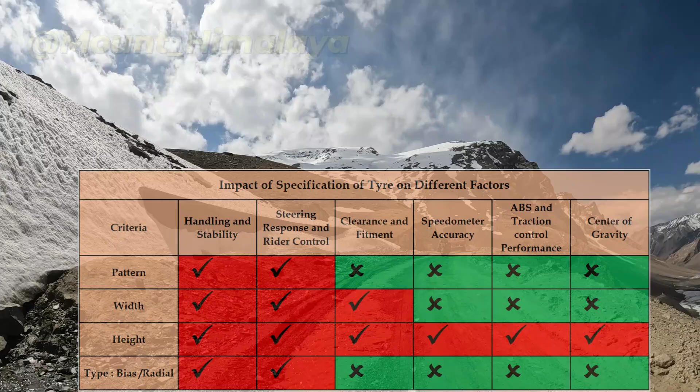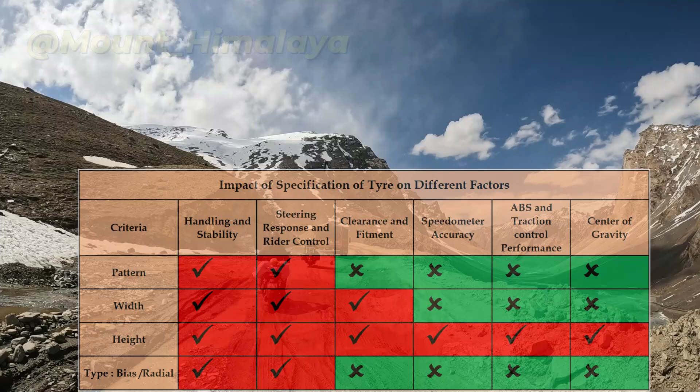Let us discuss the impact of changing the specification of the tire, assuming that you are not changing the rim size. I am considering the pattern of the tire, width of the tire, height of the tire, and type of the tire. Type of the tire means radial or bias. The pattern selection is purely based on usage, whether you are using it on-road, off-road, 50% on-road, 50% off-road, in snow conditions, wet, or dry. Pattern of tire depends on these requirements of usage.

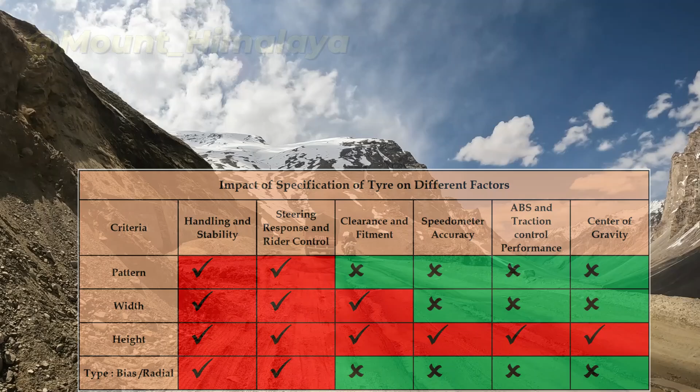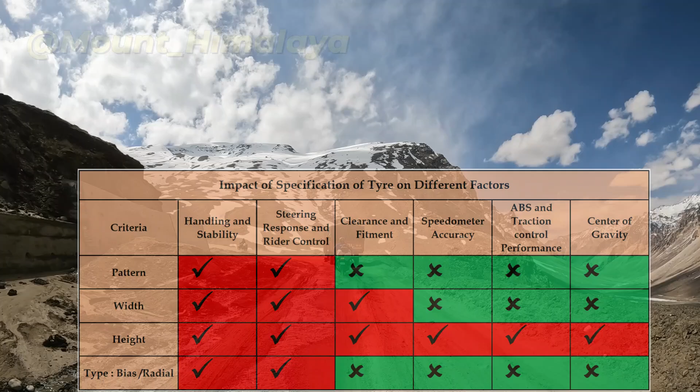Let us discuss how these four factors are going to affect handling and stability, steering response and rider control, clearance and fitment, speedometer accuracy, ABS and traction control performance, center of gravity and weight distribution. Look at the table. Here I have considered the specification of tires and how it is going to affect these factors.

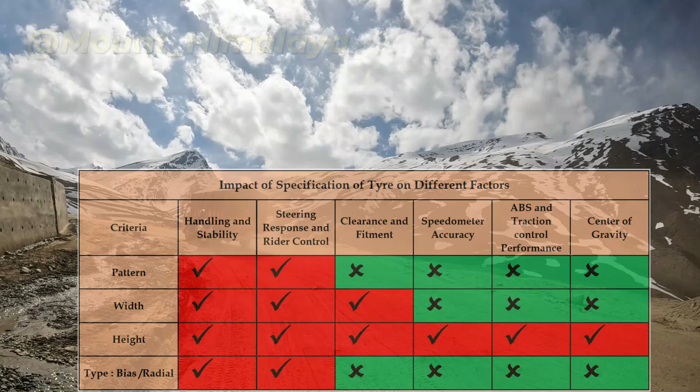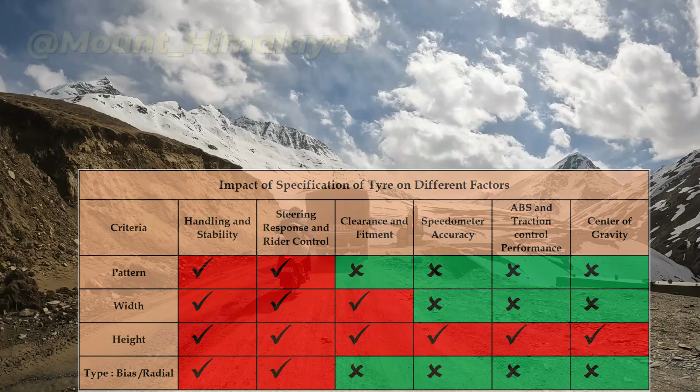Changing to a tire of different pattern is going to alter the handling and stability of the bike either way. It can give a good or bad experience after changing the pattern of the tire. So please choose your pattern based on your usage type: off-roading, on-roading, 50% off-roading or 50% on-roading, etc. Similarly, changing the pattern can affect the steering response too.

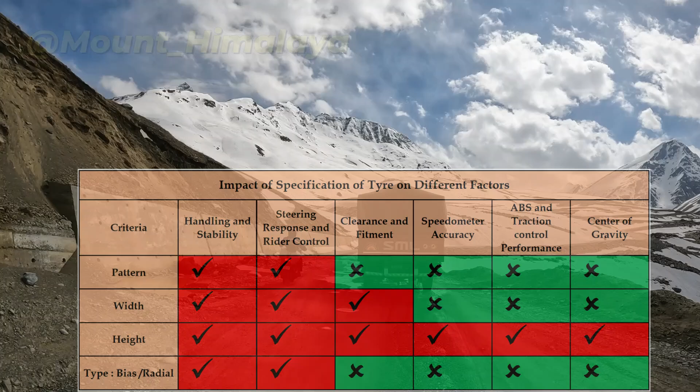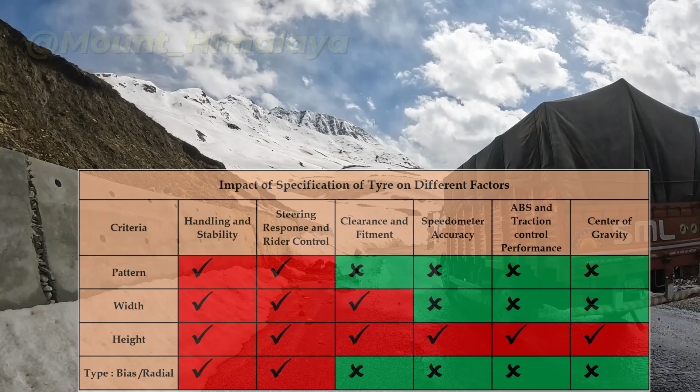At the same time, changing the pattern is not going to affect the clearance and fitment with the mudguard and all these things. It's not going to affect speedometer accuracy either. For ABS and traction control, there is no impact from changing the pattern. There is also no impact on the center of gravity of the vehicle by changing the pattern of the tire. So you can simply change the pattern of tire for handling and stability, and steering response.

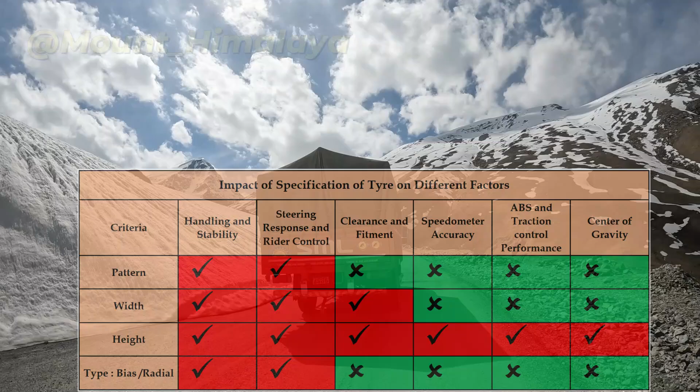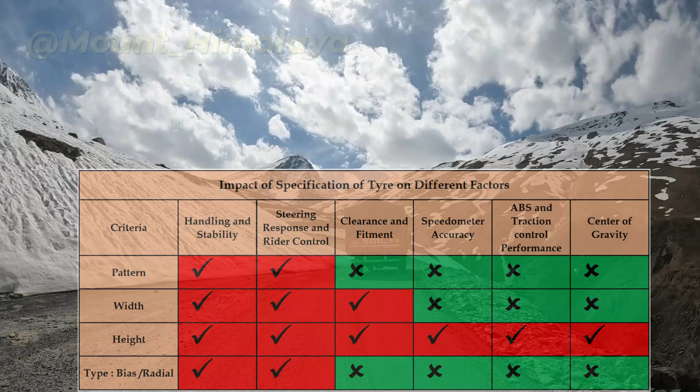Next is the impact of changing the width of the tire on handling and stability. Yes, changing the width of the tire is going to impact handling and stability. The handling and stability will be affected once you change the width of the tire, and steering response and rider control will also be affected. Clearance and fitment, sometimes the mudguard, the gap, everything can be affected if you change the width of the tire.

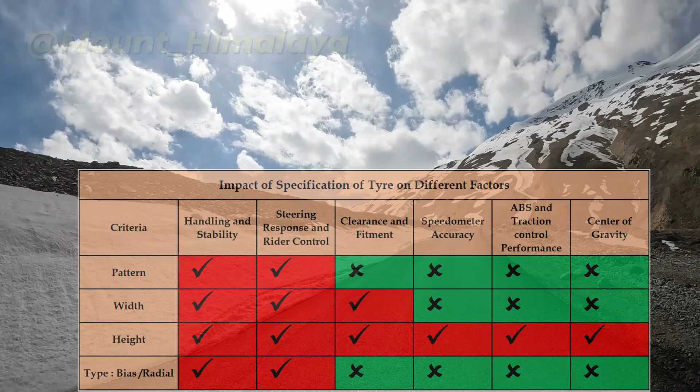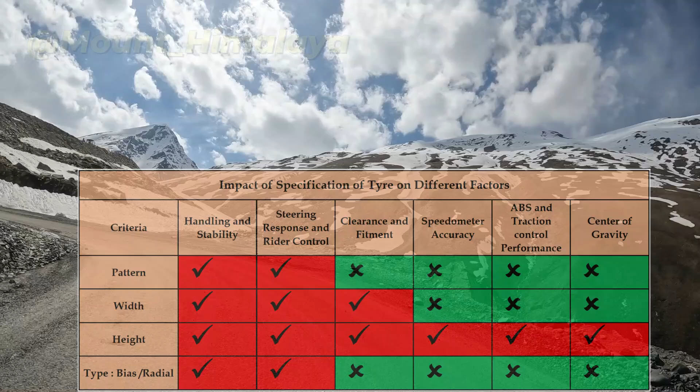Please note that there is a superstition that a wider tire is going to give you more traction, which is absolutely wrong. If you know the fundamental physics, since the total force remains the same, it will just be distributed, so there will not be any improvement of traction if you increase the width of the tire. Also, just changing the width of the tire is not going to affect the speedometer accuracy, ABS and traction control performance, and it is not affecting the center of gravity of the vehicle.

Next is how the height of the tire is going to impact these factors. First is handling and stability. An increase or decrease in height can definitely affect the handling and stability of the vehicle. It can affect the steering response too, and rider control also. It can affect the clearance and fitment. Since the tire height is changing, it is definitely going to affect the rotation. That means your speedometer accuracy will definitely be affected.

Also, the calibration of ABS and traction control will be affected. Due to the height changes, it will definitely affect the center of gravity too. So from this table, you will come to know height is a factor impacting all of these. So changing the height of the tire is not recommended.

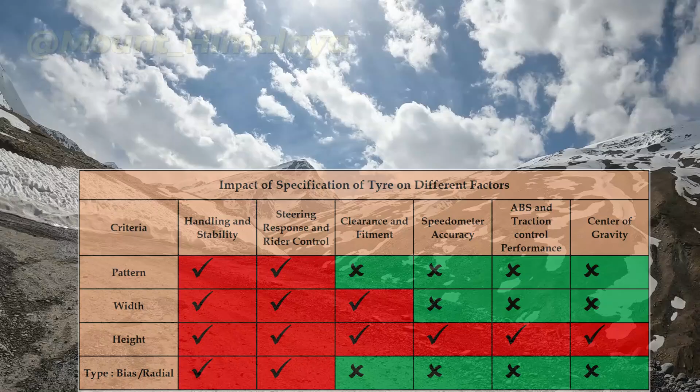Next is the impact of radial and bias tires on these factors. Radial tires can offer more comfort than bias ply tires. Bias ply tires are often used for heavy loads and off-road purposes, whereas radial tires offer superior traction and grip with consistent road contact, making them ideal for high speed and everyday use.

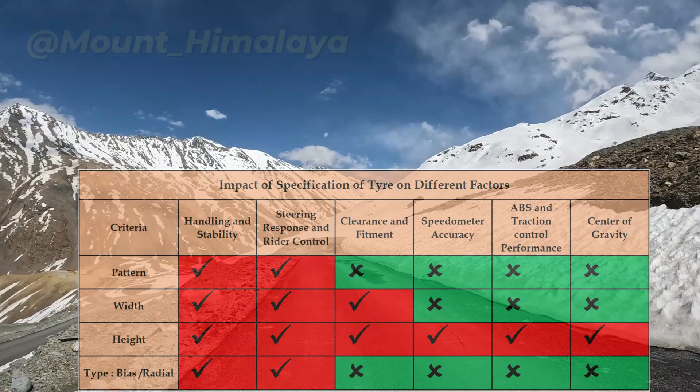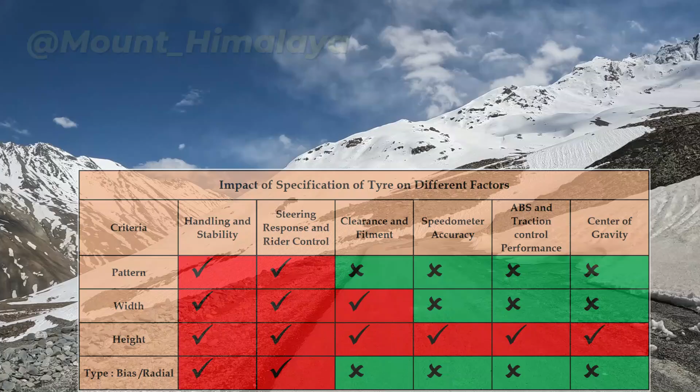So changing the tire type is going to affect the handling and stability, steering response and rider control. But it's not going to affect the clearance or fitment, speedometer accuracy, or ABS and traction control calibration, and the center of gravity is also unaffected by the change of tire type.

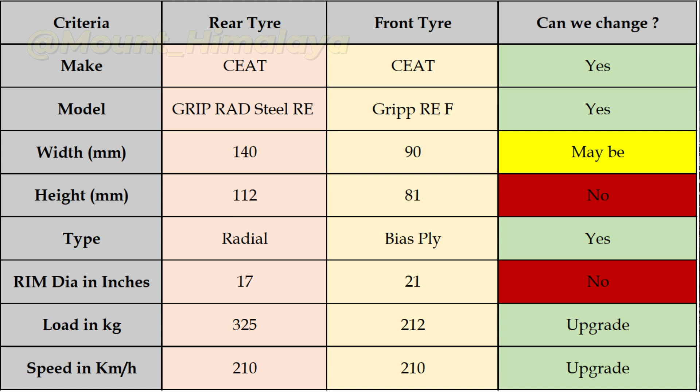Also, I have indicated that make you can change, model you can change, width is not advisable. Height you should not change. Type, yes, you can change if needed. Rim, you should not change the rim size. Load in kg, you can upgrade it, but don't downgrade it. Speed in kilometers per hour, you can upgrade it, don't downgrade it from the stock tires.

Let me show a wider tire selection for my rear tire of the Himalayan 450 and its feedback. I have changed my rear tire from CEAT to Dunlop K591. So let us evaluate each criterion. Make, I changed from CEAT to Dunlop. Model, GRIP RAD Steel RE, I have changed to K591. Width, earlier the stock tire was 140. I changed to 160. Height, it is 112.

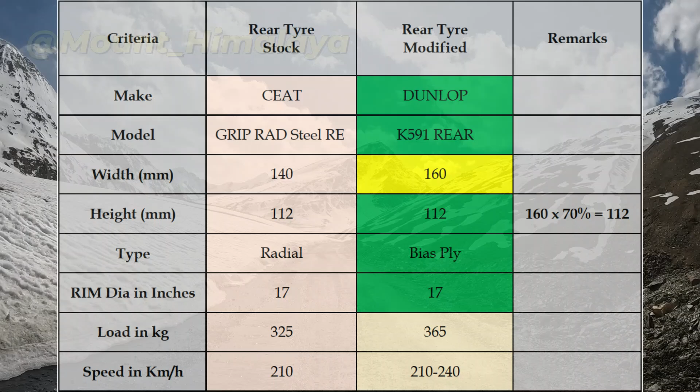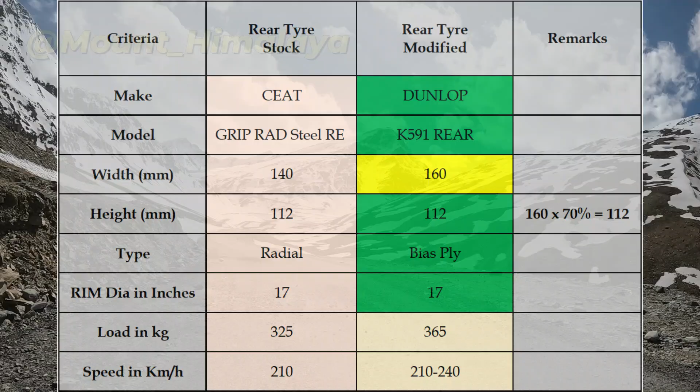So I selected a tire which is 160/70, so that is again 112. So height-wise there is no change, so there is no problem with the speedometer accuracy. Type, the stock tire was radial and I went for bias ply. Rim diameter is 17 in both cases. Load, the stock tire can take up to 325 kg; mine takes up to 365 kg. Speed in kilometers per hour, the stock tire was 210, and this ranges from 210 to 240.

And this is a tire which is more of a road tire, we can say a track tire. So I was struggling in off-roading with this tire. In wet conditions, it was sliding and slippery. I made two mistakes. First, this model was the wrong selection; it was not a 50-50 tire, it is more of a road tire. Second, I increased the width. Due to the increased width, I have to lean my vehicle more in corners at the same speed. The rest was okay. I mentioned this incident in an earlier video.

As a conclusion, it is recommended that you can change the pattern of the tire as per your daily usage. Changing the width of the tire is not recommended. As I said earlier, changing the width of the tire is not going to increase traction. Also, when turning at the same speed and corner radius, a wider tire requires more lean angle than a narrow tire. That indicates it will be difficult to turn corners with wider tires, as you have to lean your vehicle more. A wider tire can offer better shock absorption due to the increased air volume. That is a fact actually.

It is not at all recommended to change the height of the tire. You can change from radial to bias or bias to radial as your usage requires. Always check that the speed rating of the tire and the weight it can carry are greater than the manufacturer's recommendations when selecting new tires.